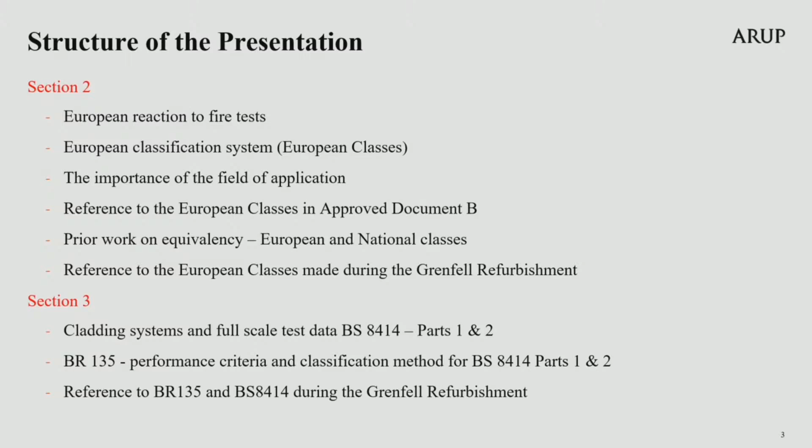In section 2, I will explain the 4 European reaction to fire tests, the European classification criteria, and the resulting European classes relied upon within approved document B. I will explain the importance placed on the relevant field of application for products tested using European reaction to fire tests, set out how European classes are referred to from approved document B, and then address some issues regarding equivalency when comparing the European classes with the national classes.

Finally, in section 3, I will provide a summary description of both the performance criteria given in the BRE report 135, which considers cladding systems, not individual products. I will also explain the full-scale tests and data produced from the fire tests called British Standard 8414, Parts 1 and 2. The data obtained from these tests is assessed using BR 135.

Then a classification report can be produced for the cladding system tested. I will explain earlier versions of these publications also and how they have been referenced from the statutory guidance documents over time.

The first thing I will present to you today relates to the basic science of fire in a compartment or room. A fire is characterised in a series of discrete stages for the purposes of scientific calculations and understanding. It is very useful to understand those stages and how they relate to the reaction to fire tests I'm setting out for you today.

I thought it was useful to explain in brief how fires behave in compartments or rooms because of what is stated in British Standard 476 Part 10. British Standard 476 contains a series of fire tests, 4 of which I'll be explaining in detail today. They are the 4 national reaction to fire tests.

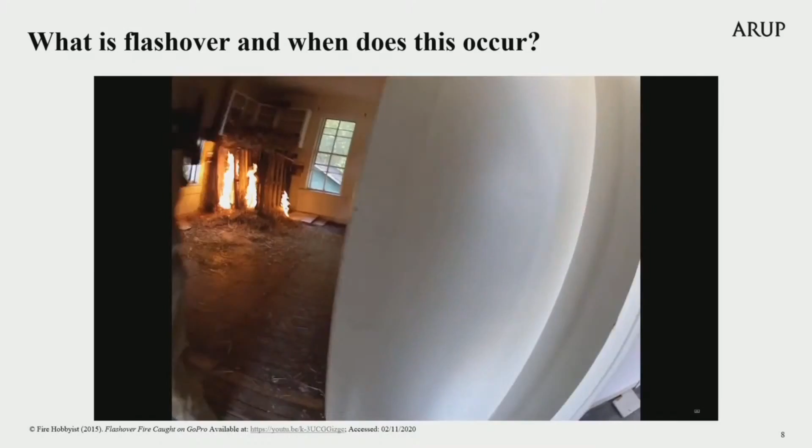It's from the helmet cam of a firefighter in a room as a fire grows rapidly. Watch how quickly the fire takes hold of the stacked timber in the corner and forms a smoke and flame layer at the ceiling within the room. The flame spreads across the ceiling, seeking out ventilation along the corridor. The smoke and flame layer builds down to floor level.

This room contains very little combustible material, and so a prolonged, fully developed fire cannot occur.

So back to BS 476 Part 10. It helpfully sets out what tests in the 476 series are relevant in the context of the classic room fire stages I have just summarised for you. It places the reaction to fire tests as relevant to the period of time before flashover. Flashover is marked with an X on this graph. The reaction to fire test references can be observed in the red marked area underneath flashover.

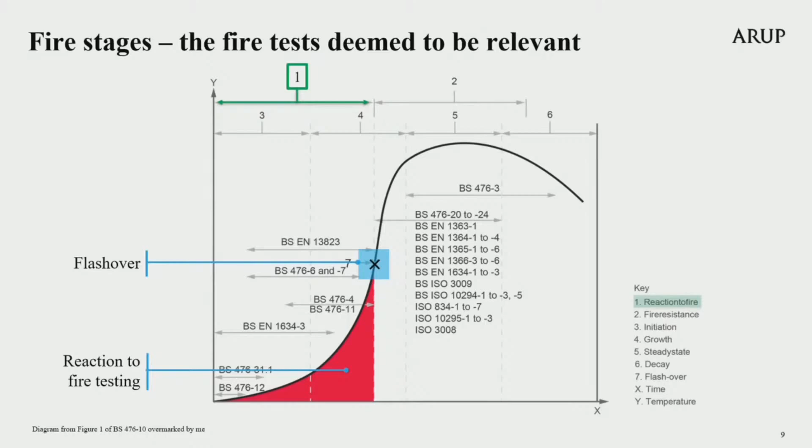The reaction to fire tests referred to for the external wall in the statutory guidance document are therefore associated with pre-flashover or early stage internal room fire growth. There are other tests referenced by the British Standard for the post-flashover condition, after the X marked on the graph. But what of reality, as we saw at Grenfell and have seen elsewhere?

We know there was a prolonged decay phase, in that it occurred at different times in all different parts of the tower. In this phase, the rate of burning is diminishing, the fuel is depleted of volatiles, the gas formed when something is heated in a fire. Flaming eventually ceases, and this stage leaves a mass of glowing embers. This state may remain for long periods, and there can even remain high localised temperatures.

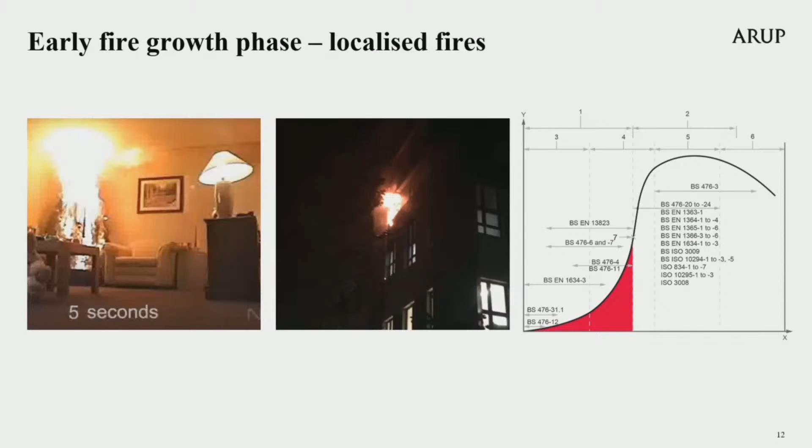And we know too that flashover did occur in many compartments, and so fully developed fires were observed throughout the night. The scale of these post-flashover fires, or fully developed fires, are much larger and their consequences more severe than the pre-flashover conditions. Flames may emerge from ventilation openings such as windows.

The threat to neighbouring compartments or adjacent buildings is then at its highest. The fire can spread through any internal openings, such as doors or unsealed openings in the compartment. So this is the stage of the fire when damage to structure becomes a concern. It is the time of highest life safety risk to firefighters, and it is too late for anyone who has not already left the compartment.

The panel can consider the following point: this external scenario, either when small or large, was separate to the internal room fire. This internal fire behaviour is characterised by the temperature-time graphs I've shown you today.

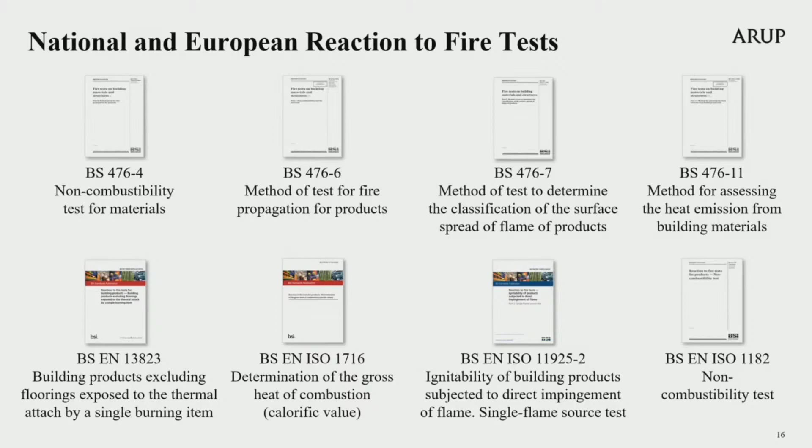I will now explain the setup for each one of these tests, how the test is then done, and how the results from each test is then used and relied upon to classify the performance of construction products and materials.

The 4 national reaction to fire tests are part of BS 476 series, as I said. Each part addresses a different element of contribution in a fire. Part 4 is a test of non-combustibility for materials. Part 6 is a test of fire propagation for products, meaning a comparative measure of the contribution to the growth of fire of a combustible material. Part 7 is a test to classify the surface spread of flame of a product. And Part 11 is a test to assess the heat emission from materials.

British standards are issued by the British Standards Institution. There are specific subcommittees made up of industry and governmental bodies that draft the standards. The second page of the standards typically lists the parties involved in drafting the standard. On screen now are examples taken from Part 4 and Part 6.

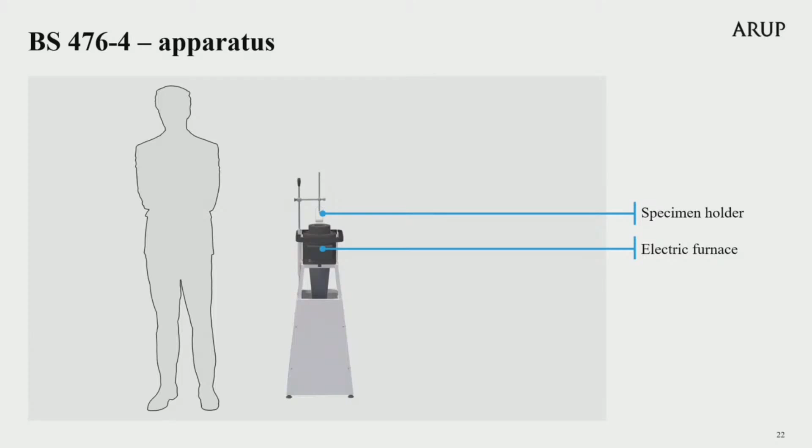A second thermocouple is placed in the centre of the specimen, inserted from the top. This shielded thermocouple shall maintain contact with the material at the bottom of the hole, drilled down halfway into the specimen.

The image on screen shows a cross-section through the furnace. The key thing to observe here is that the heat is provided by running electricity through wire coils wrapped around a central tube made of alumina refractory material. No direct flame impingement occurs in this test.

3 specimens are prepared, each side a length of 40 millimetres with a height of 50 millimetres. My colleague Tom is now holding up an exact replica of the size of the Part 4 specimen.

One complete test consists of testing 3 specimens, each specimen tested separately in the furnace. The specimen is placed in the specimen holder, which is shown in the image on the left. This holder is 100 millimetres high.

If the thickness of the material is less than the height required of 50 millimetres, each specimen must then be made of a sufficient number of layers to achieve this thickness. These layers should occupy a horizontal position in the specimen holder and held together firmly without compression of the specimen by steel wires to prevent air gaps.

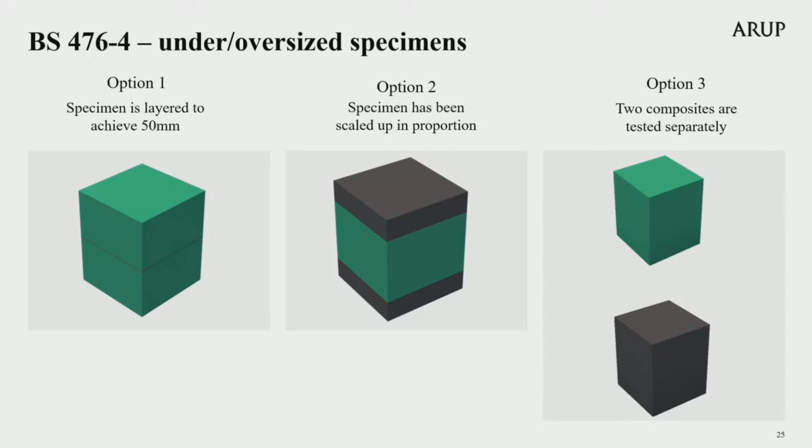I will now present a video of the test procedure.

For a tested material to be considered non-combustible by means of this test, none of the three specimens during the test must either cause the temperature reading from either of the two thermocouples to rise by 50 degrees Celsius or more above the initial furnace temperature, or be observed to flame continuously for 10 seconds or more inside the furnace. Otherwise, the material shall be deemed combustible.

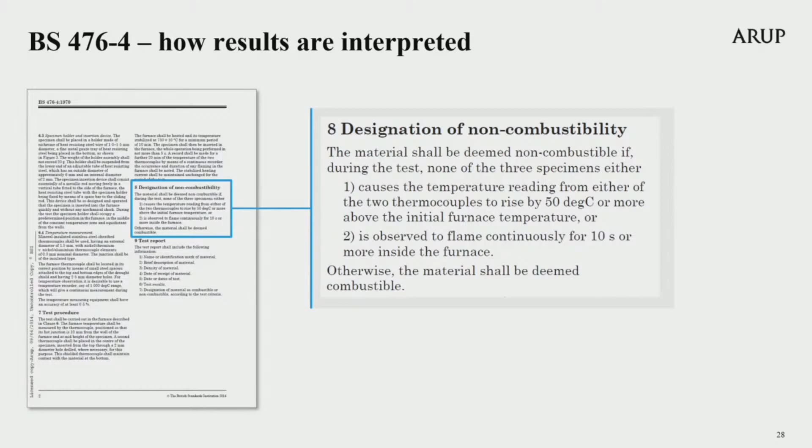The requirements of the test report are shown here, with a single designation to be provided. That concludes my description of the Part 4 non-combustibility test for materials.

This standard has had no amendments, and again, information was added to the foreword in 2014.

The Fire Vocabulary British Standard, BS 4422, defines fire as the process of combustion characterised by the emission of heat and effluent accompanied by smoke, flame, or glowing. So the purpose of this test is to assess the heat emission. It is done by measuring the temperature rise from the specimen as a result of being in a furnace, as well as the specimen mass loss and any observed flaming during the test.

The test apparatus in this heat emission test is similar to that used in the non-combustibility test, with a notable exception being the design of the specimen holder. Other amendments include a prescribed design for the electrical furnace windings. A mirror is proposed to allow the operator to observe flaming more easily. The apparatus also includes an additional support to the specimen insertion device.

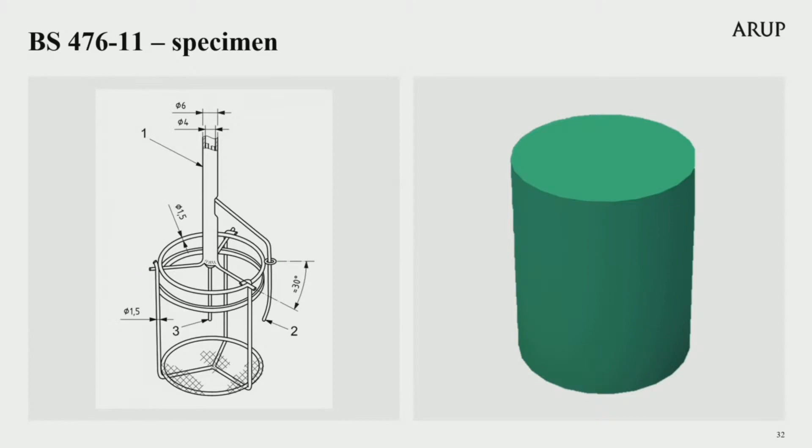The specimen is then put into the holder, as shown in the image on the left, and again a thermocouple is inserted through a 2 millimetre drilled hole at the top of the specimen. Again, specimens must meet the minimum height required for the test specimen of 50 millimetres.

For a material with a normal thickness greater than 50 mil, it should be reduced. If the thickness of the material is less than 50 mil, the right height should be made using a sufficient number of layers of the material or adjusting the material thickness.

The video on screen now shows this test procedure.

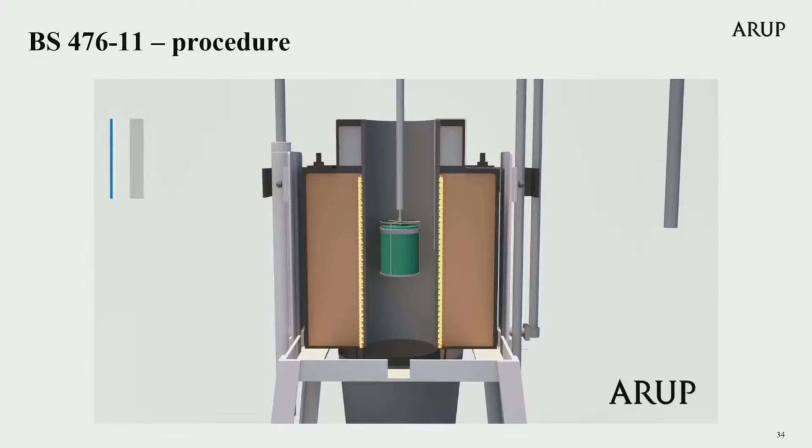Following the test, 2 results are calculated. First, the furnace temperature rise is calculated as the maximum furnace temperature minus the final furnace temperature. Secondly, the specimen temperature rise is calculated by taking the maximum specimen temperature minus the final specimen temperature.

This is calculated for each of the 5 specimens and an average value is obtained. The average duration of total sustained flaming is also calculated for the 5 samples and recorded in the report. The operator is also required to calculate and record the density, calculate the arithmetic mean of the density, calculate and record the mass loss of each individual specimen, and calculate the arithmetic mean of the mass loss of the specimens tested as a percentage. These 5 measurements must be recorded in the fire test report.

It is a requirement of the test report that the following text is stated: the results relate only to the behaviour of the specimens of the material under the particular conditions of the test. The results obtained on an individual material used in a combination should not be construed as reflecting the performance of the material combination as a whole, which may be influenced by the mechanism of combining the individual materials together, such as with adhesives. The results are not intended to be the sole criterion for assessing the potential fire hazard of the material in use. This is the important test for materials of limited combustibility, noting no evidence of such a test has been submitted to the inquiry at this time.

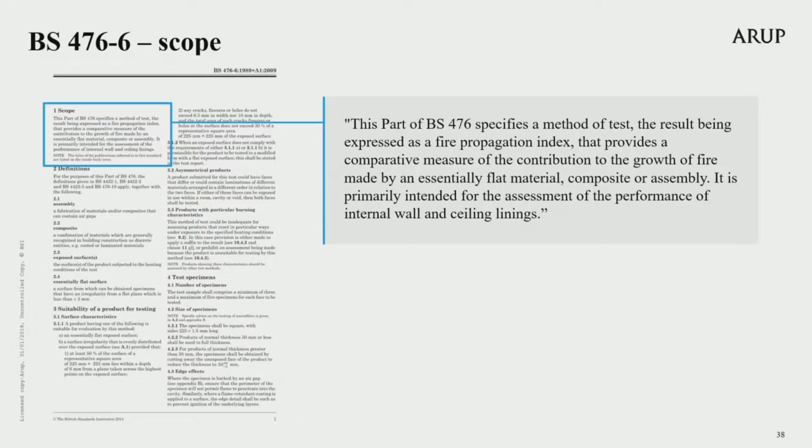The test apparatus comprises a combustion chamber with a specimen holder that is fixed onto the front face. The combustion chamber contains a horizontal gas burner tube and 2 electrical heating elements, and is surmounted by a removable steel chimney and cowl. The specimen holder is made from calcium silicate board, having the same dry density and properties as that of the walls of the combustion chamber.

The holder is recessed to take a specimen of area 225 millimetres by 225 millimetres, with a recessed depth of 12.5, 25, or 50 millimetres, depending on the specimen to be tested. A non-combustible compressible gasket 1 millimetre thick is provided for interposing between the specimen holder and the combustion chamber to assist in obtaining an adequate seal.

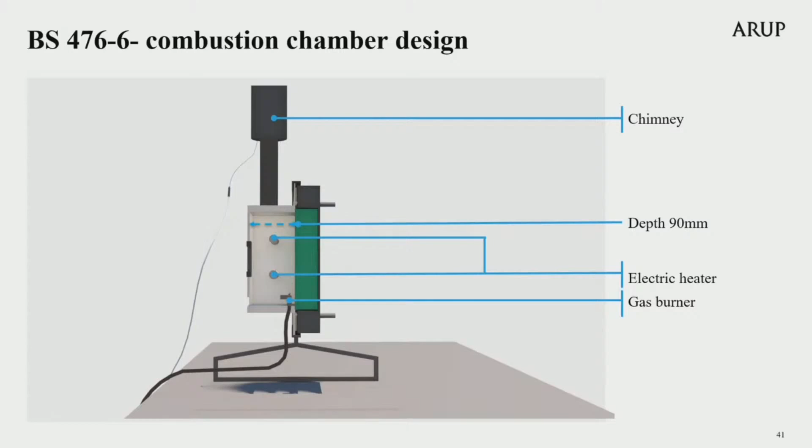The image on screen shows the specimen being held up in front of the opening to the combustion chamber. The opening to the combustion chamber recess is slightly smaller than the green specimen on the screen. Each specimen is square and measures 225 by 225, as I said. My colleague Tom is now holding up an example of the Part 6 specimen.

Whilst the sample is of dimension 225 millimetres, the opening in the combustion chamber is 190 by 190 millimetres. The result of this is that a boundary around the edge of the sample is not directly exposed to the heat from the electric heaters and gas burner.

Products with a normal thickness of 50 millimetres or less are tested at full thickness. For products of normal thickness greater than 50 millimetres, the specimen is obtained by cutting away the unexposed face of the product to reduce the thickness to the required 50 millimetres.

It is stated in the standard that where the product is normally used as a freestanding sheet, an airspace should be provided at the back of the product by testing over non-combustible perimeter battens. Where the specimen is backed by an air gap, ensure that the perimeter of the specimen will not permit flame to penetrate into the cavity. Similarly, where a flame retardant coating is applied to a surface, the edge detail shall be such as to prevent ignition of the underlying layers.

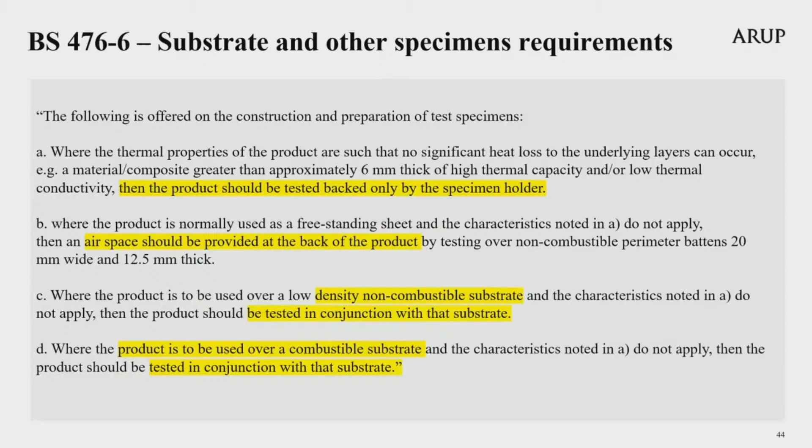These must include intumescence or deformation or spalling of the specimen that tends to block the burner ports so the required gas input cannot be maintained, or melting or slumping of the specimen that results in material escaping from the air inlet or being confined to the recess of the specimen holder where it is not exposed to the heating conditions.

Airflow through the apparatus being restricted owing to obstruction of the inlet port by fallen material or by soot accumulation in the chimney. Occurrence of any of the above phenomena shall deem the test on that specimen to be invalid.

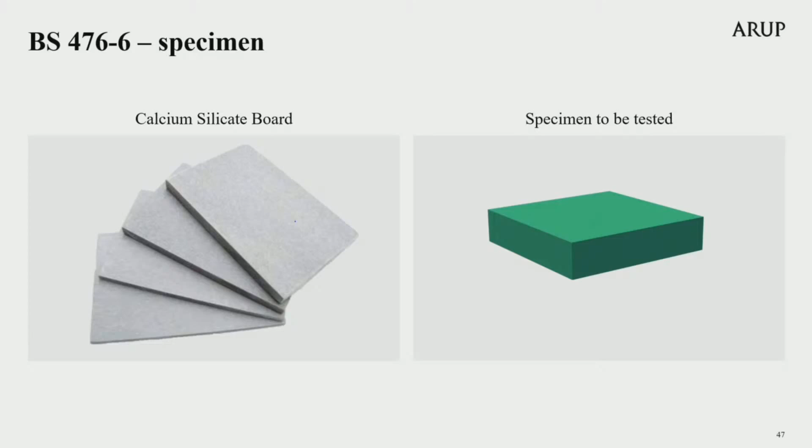I will now present a video of this test procedure.

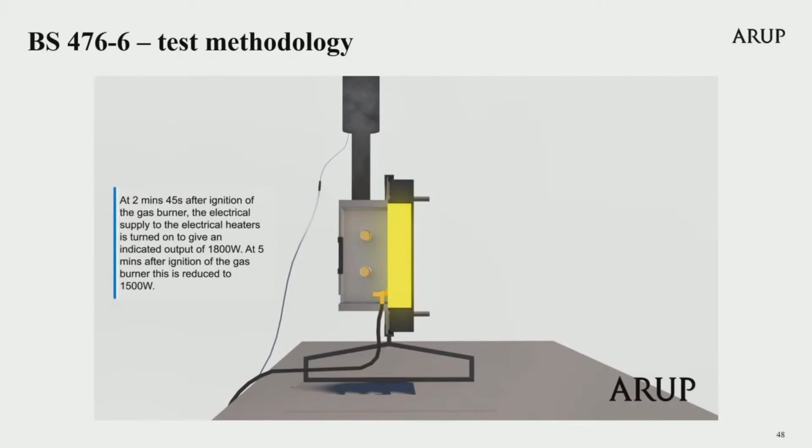The output from the 2 thermocouples located in the chimney is recorded at some specific intervals we need to discuss. At 0.5 minute intervals up to and including 3 minutes from the time at which the gas was ignited, and this is then converted to a parameter called S1.

At 1 minute intervals up to and including 10 minutes from the time at which the gas was ignited, this is then converted to a parameter called S2. At 2 minute intervals up to and including 20 minutes from the time at which the gas was ignited, which is then converted to a parameter called S3.

All the visual observations should be recorded during the test as observed through the window, as I have already explained.

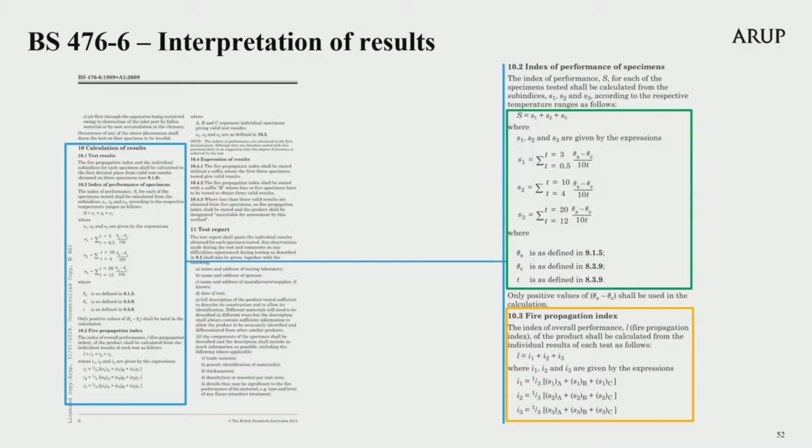The standard specifies the required contents of the test report. I particularly note the report must state details of the form in which the specimens were tested, material, composite or assembly, together with specimen thickness and, where appropriate, orientation, the backing material and the face or faces subjected to the test, and whether the material was tested in a modified form.

The statement that the suffix S to the fire propagation index indicates that the results should be treated with caution. And the test report must contain the statement that the test results relate only to the behaviour of the test specimens of the product under the particular conditions of test. They are not intended to be the sole criterion for assessing the potential fire hazard of the product in use.

The test setup is designed to prevent heating through the cut edges of the test specimen. For a composite material, therefore, such as ACM, it would mean the outer aluminium surface is heated first, and the products of combustion from any other material behind it, should they receive sufficient heat, together may cause a temperature rise in the chimney. This is why it is important to understand how much heat energy is applied to the sample in this standard test, which has a duration of 20 minutes.

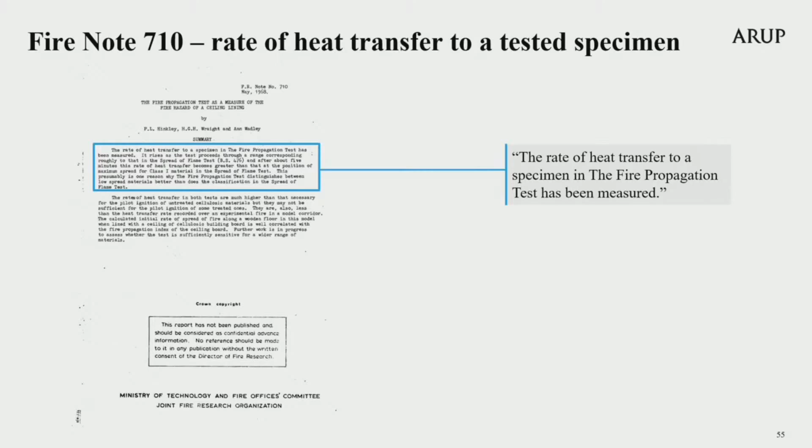I have found some historic work regarding this heating dose received on the surface of the specimen tested in Part 6. In 1968, the BRE issued Fire Note 710, titled The Fire Propagation Test as a Measure of the Fire Hazard of a Ceiling Lining. As stated in the note, part of the study involved measuring the rate of heat transfer to a specimen in the fire propagation test.

On screen now, I've shown some text explaining the heat exposure measurements produced in this paper. This is for background information only, because the key information I want to present is the graph referenced within this text.

So to understand if a similar heat received on a surface of a different type of specimen as a result of this scale of heating is then sufficient to ignite the specimen being tested, I present the following. I have compared the received heat measured in this paper on asbestos wood, shown by the dark blue line on the screen, with critical heat flux values associated with the materials used in the external wall of Grenfell Tower.

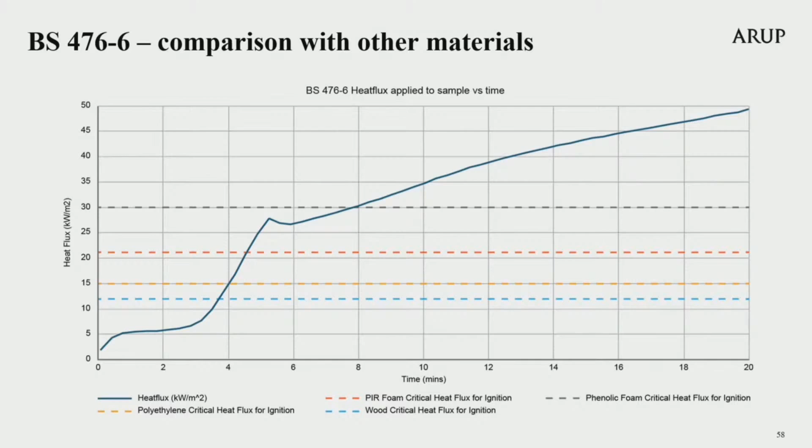To sum up, the Part 6 test is the fire propagation index test and is based on the temperatures measured in the chimney. The product tested is then assigned little s1, little s2 and little s3 sub-indices. These are averaged across 3 tests to obtain the sub-indices little i1, 2 and 3. The sub-index little i1 is therefore an average of measurements taken during the first few minutes of the test only, when the heating dose is relatively low.

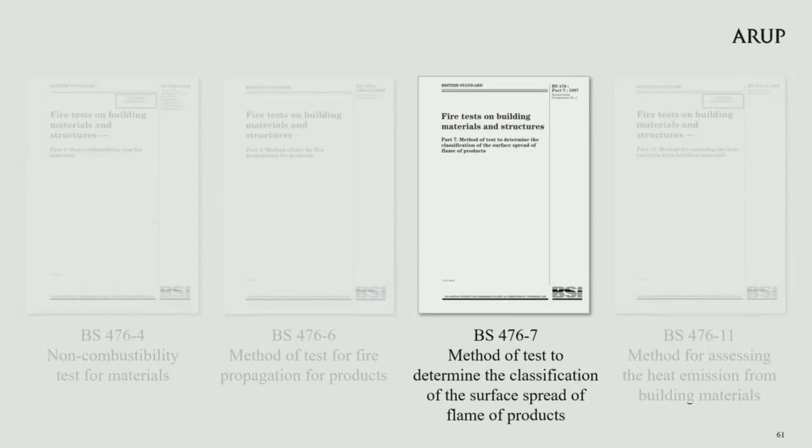The third national reaction to fire test is BS 476 Part 7, method of test to determine the classification of the surface spread of flame of products. This must be combined with Part 6, as I have just explained, when understanding the derivation of Class 0 as set out in the ADB.

I want to stress that Class 0 is not simply a surface spread of flame test, as so commonly stated. Only the Part 7 test on its own is, and there is no national class that relies solely on Part 7. Class 0 is defined on the basis of the two tests, and this is a critical distinction that must be incorporated in any evidence given to the inquiry regarding Class 0.

There have been 3 versions of Part 7 published, first in 1971, with 2 further revisions in 1987 and 1997, and a change to the foreword only in 2014.

The foreword section of Part 7 states the test takes account of the combined effects of factors such as ignition characteristics and the extent to which the flame spreads over the surface of the product under opposed flow conditions. The influence of any underlying materials on these factors in relation to their ability to influence the rate of fire growth is also taken into account.

The test result is a function of the distance and rate of the lateral spread of flame, and this is classified according to performance as classes 1 to 4.

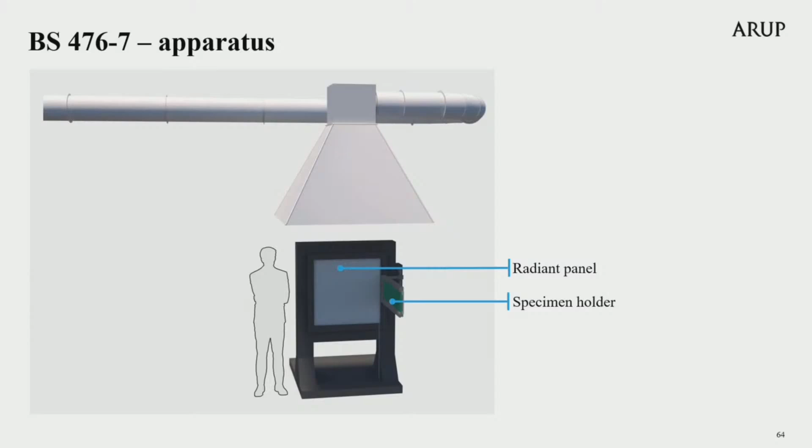This is the largest specimen required for a national reaction to fire test, and each specimen is a rectangle measuring 885 millimetres long and 270 millimetres in height. Tom is now holding up an exact replica of the Part 7 sample.

When the product is of insufficient size to allow the specimen size to be achieved in width or length, it is permissible for small pieces of the product to be placed adjacent to each other to obtain the required dimension, providing that an essentially flat surface can be achieved. It is considered in the test standard that such a procedure does not have any influence on the surface spread of flame, but the use of such specimens shall be reported.

The specimen holder comprises a water-cooled steel frame with water-cooled faceplates. The faceplates overlap the specimens by 20 millimetres on their top and bottom edges and over the vertical edge adjacent to the radiation panel. A spring-loaded clamp is positioned to clamp the specimen against the water-cooled faceplates.

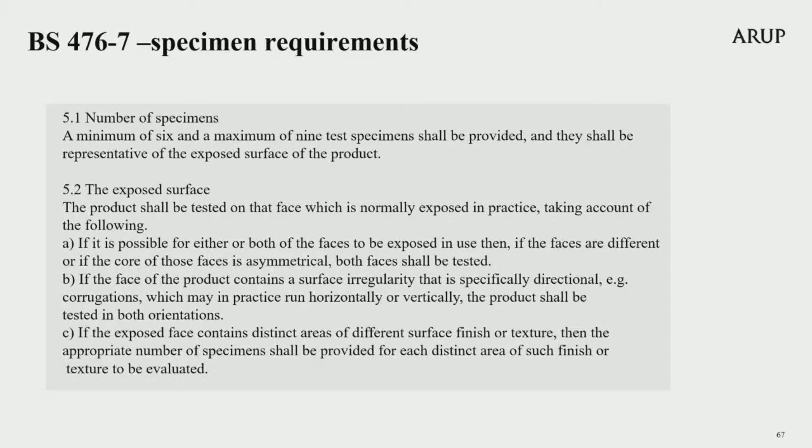The product shall be tested on that face which is normally exposed in practice, taking account of the following. If it is possible for either or both of the faces to be exposed in use, then if the faces are different, or if the core of those faces is asymmetrical, both faces shall be tested. If the face of the product contains a surface irregularity that is specifically directional, for example corrugations, the product shall be tested in both orientations. If the exposed face contains distinct areas of different surface finish or texture, then the appropriate number of specimens shall be provided for each distinct area of such finish or texture.

All specimens shall be tested at full thickness or cut away, as I explained earlier. When the product is a thin film, it shall be applied to an appropriate substrate using a method and application rate recommended by the manufacturer. The lab shall determine whether a product incorporates a thin film on its surface and shall note if this is the case. When the product is a material or composite which would normally be attached to a substrate, it shall be tested in conjunction with the appropriate substrate, also using the fixing technique recommended by the manufacturer. Please note the significance that this standard makes to the effect of the underlying substrate, and the reader is referred to Appendix B of Part 7 for more information.

Part 7 also provides a clear explanation regarding the impact of any underlying construction on the ignition performance of the surface. This test standard again provides rules on how the sample should be tested as a result.

I will now explain the heating apparatus. It essentially consists of a radiation panel mounted vertically in a surround and supported on a framework so that the centre of the panel is 1.25 metres above floor level. The radiation panel shall be supplied with a gas-air mixture. The radiation panel is 900mm by 900mm square, designed to give efficient combustion of the gas-air mixture with no flaming occurring on the face of the panel under operational conditions.

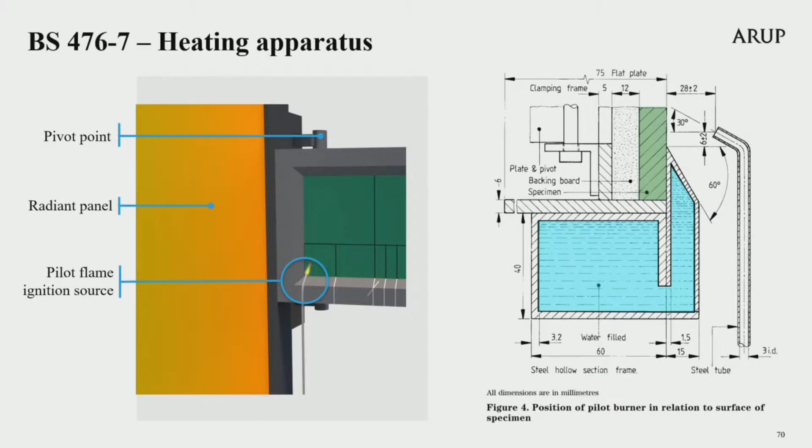The video on screen now shows this test procedure.

So do you mind if I just try and get the video to work? Yeah. Oh yeah, thank you. Apologies.

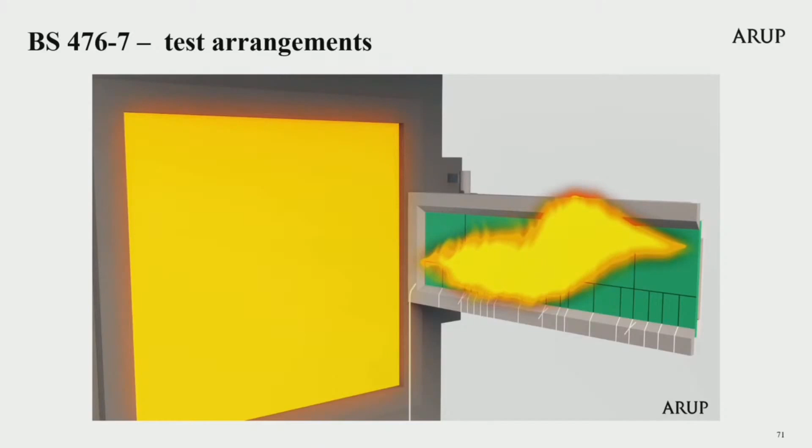Throughout the test, it is required to carefully observe the behaviour of the product and make a note of the following phenomena: flaming, transitory flaming. Observe and note other phenomena such as debris falling away from the specimen and whether it is flaming or not, and any intumescence or deformation of the specimen. These additional observations do not influence the classification of surface spread of flame.

The inquiry panel should consider that only one of these four tests actually measures the rate of flame spread across a specimen, and the purpose of that test was to measure horizontal spread along walls and ceilings.

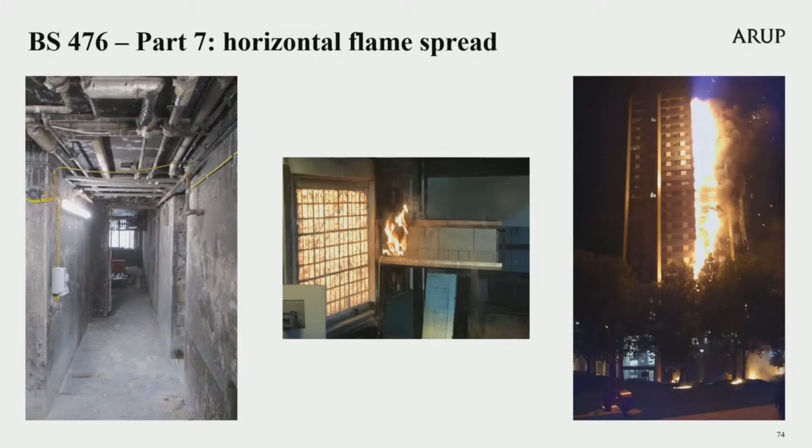I'm just going to do about two more slides.

Finally, I want to explain what extending the field of application means - a phrase that will be used over the coming months when referencing test reports and test standards. As I've shown, each test report for the national reaction to fire tests must contain specific information, including the limits of what was physically tested.

Part 10, the Guide to the Principles of Fire Testing and Their Outputs, states at paragraph 5.3: within the field of reaction to fire, direct field of application is the application of the test results for a material or product in accordance with the details of how they are tested. Specifically, this means that the mounting and fixing arrangement used in the test method is applied directly to the use of material or product in real end-use conditions.

Any variation in the physical properties or thickness of material or product in the end-use application, or variations in the mounting and fixing arrangements, should be either quantitatively determined through a carefully designed test programme, or in some cases be the subject of an assessment or expert judgment by an expert.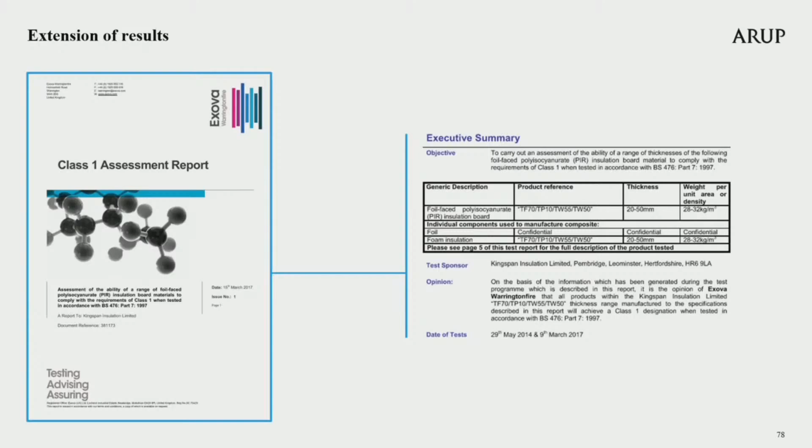No such field of application extensions have been submitted to the inquiry for cladding panels at this time. I've provided my opinion on how the BBA relied on a limited number of tests to issue a BBA certificate for cladding panels at length in my Phase 1 report.

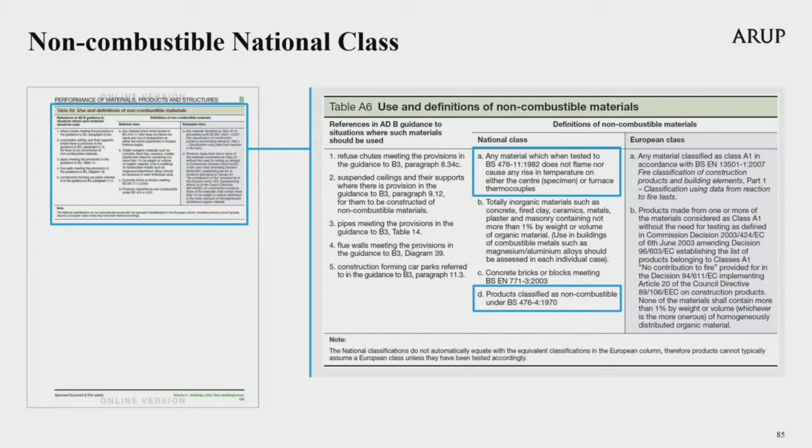The table on screen compares the 2 limits set for the national class non-combustible using Table A6 of Approved Document 2013. So one can either do a Part 4 test or a Part 11 test. All results must have been recorded as 0 if one relies on Part 11.

The second fire definition provided in Approved Document B is in Table A7, use and definitions of materials of limited combustibility. This is a key definition regarding the products used on Grenfell, as the insulation material in the external wall should have been a material of limited combustibility. You can see in paragraph A that any material defined as non-combustible will also satisfy the national class for limited combustibility too.

The primary test that can be done to demonstrate limited combustibility using national test standards is Part 11. Density limits are set, as well as flame and temperature rise limits. I have drawn out the text on the right-hand side of the screen. The column on the left-hand side provides references to specific sections of Approved Document B where limited combustibility is referenced with respect to the situations where such materials should be used. The references as shown in row 8 of the table apply only to insulation used as part of an external wall. It is critical to understand the explicit reference to insulation in the external wall made in this Table A7.

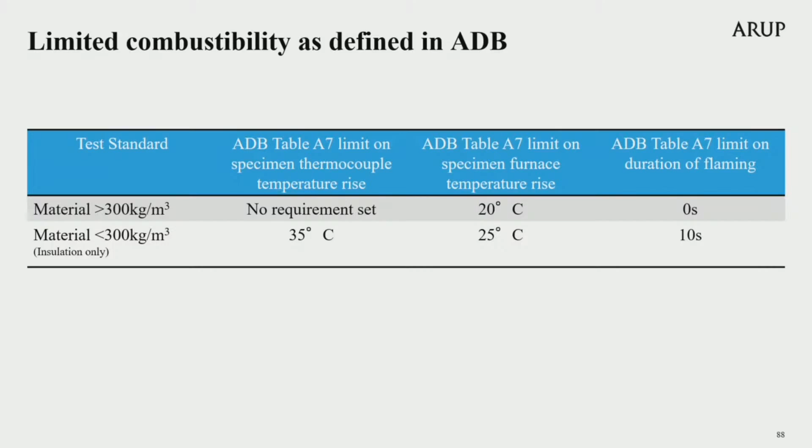The definition of a material of limited combustibility sets out not just temperature and flaming limits, but also makes a distinction regarding the density of the insulation material. If the material density is more than 300 kilograms per meters cubed, the limit on specimen furnace temperature rise is 20 degrees C, with 0 seconds of flaming to have been observed in the Part 11 test. If the material is of density less than 300 kilograms per meters cubed, the limits for observed flaming increase to a total of 10 seconds over the course of the whole test. The limit on specimen furnace temperature rise is slightly higher at 25 degrees Celsius, with an additional limit set on specimen thermocouple temperature rise of 35 degrees C.

The requirement for materials less than 300 kilograms per meters cubed density is therefore less onerous when relying on Part 11 test. It's worth noting that insulation materials are often foam-based and may well have a density less than 300 kilograms per meters cubed. For example, the density of phenolic foam and PIR, the insulation used on Grenfell, may have a density of around 35 kilograms per meters cubed.

However, a material of limited combustibility is also referenced for another component of the external wall, and this is a complex matter which I will try to explain carefully. In Table A7, up at row 6, marked in blue here on the left, there is a general row which

states Class 0 materials meeting the provisions in Appendix A, paragraph 13A. There, at Appendix A, paragraph 13A, it defines Class 0 as the highest national product performance classification for lining materials. This is achieved if a material or the surface of a composite product is one of two performances set.

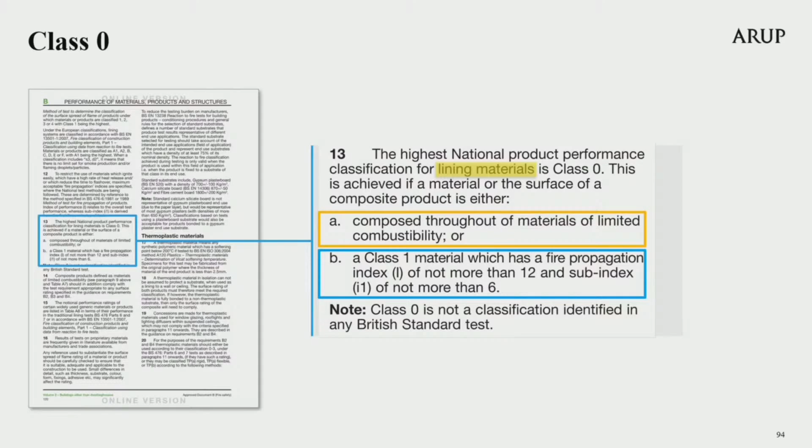These values are then used in the formulae shown on the screen now to obtain S1, S2 and S3. The calculated S1, S2 and S3 values are then averaged to obtain little I1, 2 and 3, where I is then the sum of these sub-indices.

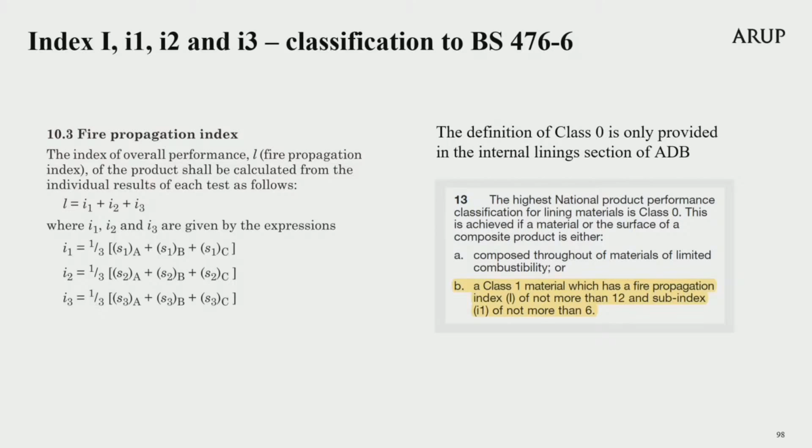Please now look again at the definition of class 0 on the screen marked in yellow. There it states for class 0, the fire propagation index must be not more than 12, and sub-index little I1 must be not more than 6. And so the test results from Part 6 on a material or composite product must fall within these limits.

Additionally, the class value of 1 must be achieved when the same product is tested to Part 7. Class 1 means the flame must not spread more than 165 millimetres from the heated end after 1.5 minutes into the test. But in Class 1, it must not also exceed this limit for the entire duration of the test for up to 10 minutes.

Because the fact that 2 test result types form the definition of Class 0 is so regularly ignored, with the surface spread of flame test mostly only referred to when discussing Class 0, I think it's important I repeat this point again, that the Class 0 material must be tested to achieve Class 1 and tested again to determine its fire propagation index and to fall under the limits set in approved document B.

Crucially, regarding the external wall at Grenfell Tower, Class 0 is also referred to within diagram 40, which presents the provisions for external surfaces or walls. Taking Grenfell Tower as the building example, the external surface classification was Class 0 for the building because it had a dimension over 18 metres and it was 1,000 millimetres or more from the relevant boundary to adjacent buildings, and this applied to the part of the building over 18 metres. See the dark grey shading on the right-hand side highlighted in yellow.

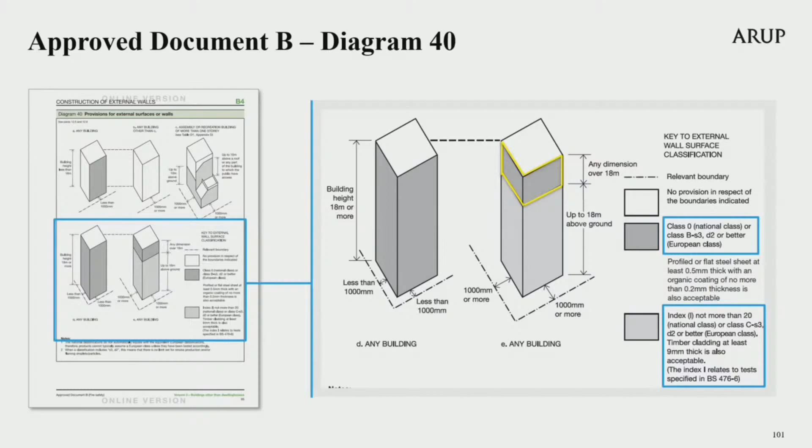Some final points about Class 0 due to its significance to the work of this inquiry. So I now want to set out how long Class 0 and the two tests upon which it relies, Part 6 and Part 7, have been referred to as the fire safety performance class for external walls in England and Wales.

The first national building regulations in England were the Building Regulations 1965. Prior to this, individual local authorities set their own performance requirements through local bylaws. London retained their own bylaws until 1985. In 1965, the external wall construction was not to include any combustible material except specific internal linings or specific external cladding.

The cladding is explained later on in Regulation E7 at Part 3B, shown on screen now. It required cladding on any external wall more than 3 feet from the boundary in a building greater than 50 feet in height to have a surface complying with the requirements for Class 0. Class 0 at that time was defined by prescribed construction typologies and with the only test referenced, the surface spread of flame test as existed in 1953.

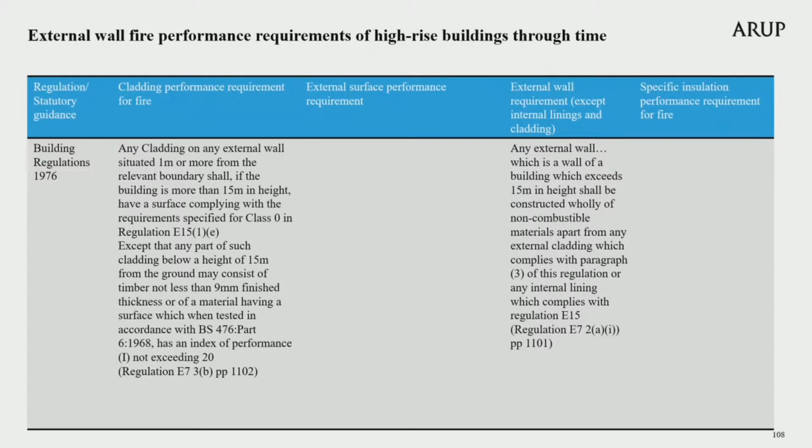In 1976, external cladding above 15 metres was still required to achieve Class 0. However, the definition of Class 0 was changed again this year to refer to both Part 6 and Part 7 tests. In 1985, the fire performance for the external wall performance was dropped down from non-combustible to constructed of materials of limited combustibility, and the Part 11 test standard was introduced. There were some changes too to Class 0, and I will explain these later.

In 1992, for the first time, a separate external wall surface. The insulation performance standard was a material of limited combustibility. The definition of high-rise increased from 15 to 20 metres. In 2000, an alternative for the external surface only was introduced by means of a BRE Fire Note number 9, with the insulation performance limits now set only for a ventilated cavity. The definition of high-rise was also lowered to 18 metres.

In 2002, the European classification system was introduced as an alternative to the national classes. In 2006, an alternative approach for the whole performance of the external wall was introduced by means of BR 135, and the insulation definition changed again, as shown on the slide. This has remained the case until 2013.

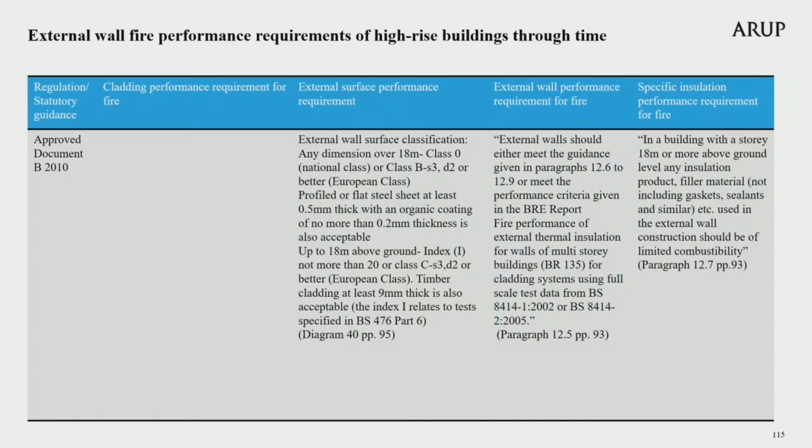I have shown how Class 0 has been referred to in the building regulations and statutory design guidance for that time period. It's important for the panel to understand the primary changes to the definition of Class 0 in that time period also.

Class 0 was originally based on a surface spread of flame test only, from the 1953 test standard, but was defined in 3 different ways: non-combustible throughout, or a material with a non-combustible background and specific tested fire performance of the surface, or a material with a combustible background but non-combustible face. Note the careful distinction between substrate and surface.

There were a few changes in the 1972 building regulations. Part 6, the fire propagation test, had been created by the BRE in 1968 after they identified that the highest classification, Class 1, from the surface spread of flame test could not differentiate between different combustible linings. The definition of Class 0 was therefore changed to refer to Part 6 only. The combustible substrate with non-combustible surface definition was dropped, leaving 2 options instead of 3: non-combustible throughout was retained, and the second option relied on the Part 6 test.

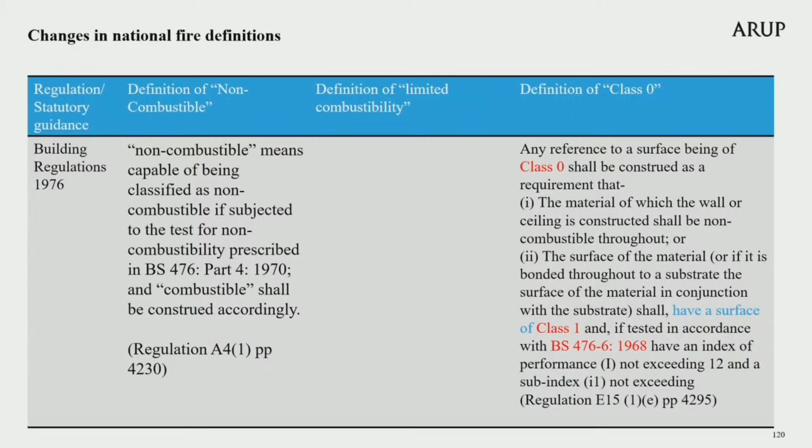This changed again in 1976, when the definition of Class 0 became based on both Part 6 and Part 7, and this combination of tests has been relied on ever since. The 2 distinct definitions for Class 0 remained: either constructed throughout with non-combustible materials, or a surface tested with a substrate, as shown on the slide.

However, in 1985, the definition of Class 0 was significantly changed. First, it stopped relying on non-combustible materials, and instead a Class 0 material or surface of a composite product could be composed throughout of materials of limited combustibility, a lower standard. Secondly, the requirement to consider the substrate with the surface was removed from the text in the statutory guidance document. This remained the definition up to the time of the Grenfell fire.

During the primary refurbishment works, the national class standards were relevant. These first referred to Section 12 of Approved Document B, in accordance with external surfaces at Section 12.6. The external surfaces of walls should meet the provisions in Diagram 40, where the national class note is cited as I have explained. And for insulation materials and products at Section 12.7, in a building with a storey 18 metres or more above ground level, any insulation product, filler material, not including gaskets, sealants and similar, used in the external wall construction should be of limited combustibility.

The Celotex FR5000, RS5000 and the Kingspan K15 insulation were presented as achieving national class naught. They were not presented as the required material of limited combustibility. ADB in Table A7 for materials of limited combustibility, at row 8 for insulation, makes no reference to class naught.

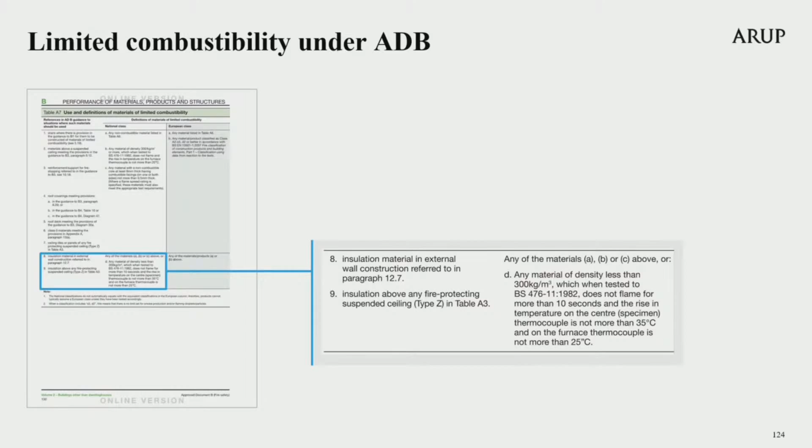The Arconic Reynobond panels were also presented as achieving a national class on their BBA agrément certificate, which stated behaviour in relation to fire. In relation to the building regulations for reaction to fire, the panels may be regarded as having a class naught surface.

This certificate then goes on to state at 6.2 that a fire retardant sample of the product with a metallic grey PVDF finish, when tested in accordance with Part 6, achieved a fire propagation index I of 0, and when tested in accordance with Part 7, achieved a Class 1 surface spread of flame. It goes on to state at 6.3, as a consequence of Section 6.1, which I will explain later, and Section 6.2, that the products may be regarded as having a Class 0 surface in relation to Approved Document B of the Building Regulations 2000.

I wanted to show you the test results from the test report upon which the BBA relied. There you can see the fire propagation index is recorded as 1, and the sub-index little I1 as 0.

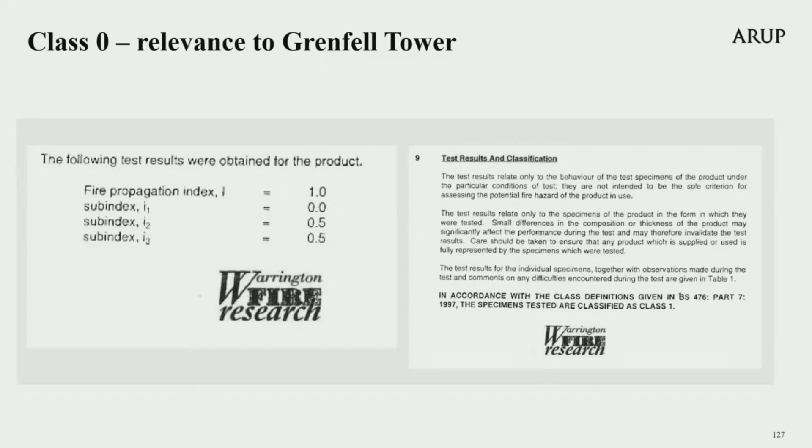And that concludes my section of the presentation on the national classes and classifications. Thank you. Just going to do a short pause.

Okay, I will now explain the European reaction to fire tests. It is useful to note that some of the test methods are similar to those relied upon in the national class system, and others are very different. Also, there's a dedicated classification process presented in a bespoke classification standard. Therefore, the European system does not rely on definitions within the statutory guidance document as occurs for the national classes.

I'm going to explain 4 European test standards. Unlike the British tests, which all sit within the 476 series, the European reaction to fire tests each have their own unique numbering, as does the associated classification standard, called BSEN 13501 Part 1. First, I will explain each of the 4 tests, and then I will explain the classification standard.

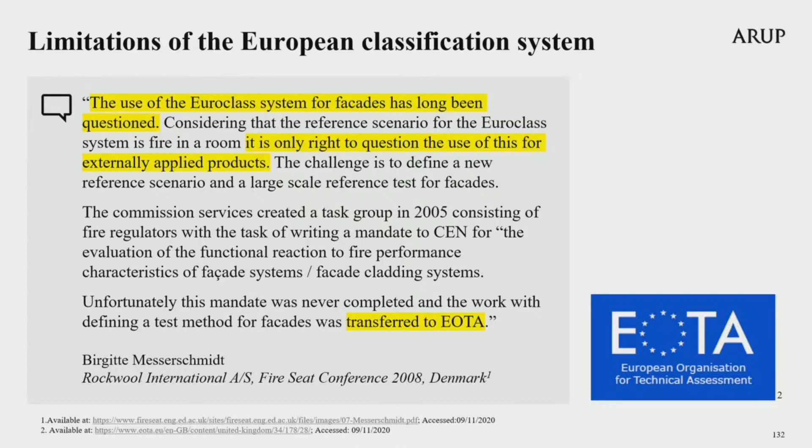There are 4 European reaction to fire tests referenced by the classification standard for construction products. Each part addresses a different element of contribution in a fire. BSEN ISO 1182 is a test of non-combustibility for materials. BSEN ISO 1716 is a test to determine the gross heat of combustion in a bomb calorimeter. BSEN 13823 tests how a specimen reacts when exposed to thermal attack by a single burning item in the corner of a room. And finally, BSEN ISO 11925-2 measures the extent of vertical fire spread and production of flaming droplets and particles when a specimen is exposed to a single flame source for a defined period of time only.

The first European reaction to fire test I will describe is the non-combustibility test. The 2010 version was relevant during the Grenfell Tower refurbishment. It is cited as the fifth edition of the standard, cancelling and replacing the 4th edition before it.

This test is used for determining the non-combustibility performance under specified conditions of homogeneous products and substantial components of non-homogeneous products. The test apparatus is very similar to that used in BS 476 Part 11, as it comprises an electric furnace capable of maintaining a steady temperature of 750 degrees C. In the European test, thermocouples are used to measure the temperature within the furnace. A specimen thermocouple can be added optionally, and it is not subsequently used in the classification.

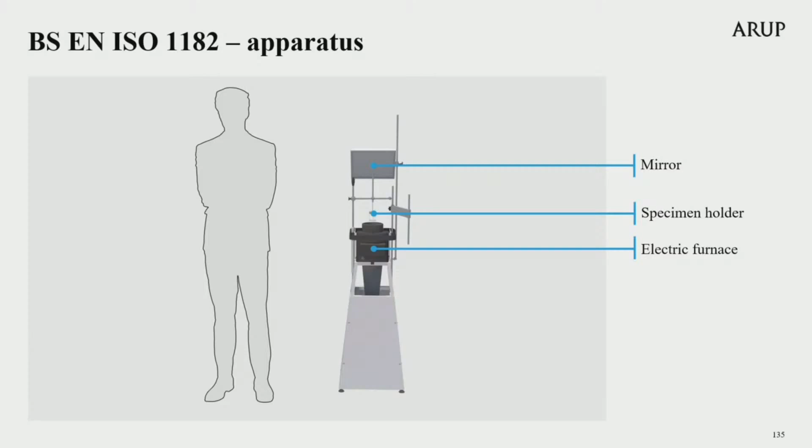5 cylindrical specimens are prepared, each with a diameter of 45 millimetres and a height of 50 millimetres. They are tested individually, but data is required from all 5 specimens to determine the final test result. If the thickness of the material is different to 50 mil, specimens may be layered and then secured with steel wires, or the material thickness may be adjusted.

Tom is now holding up examples of these specimens for the European test.

Prior to the test, specimens are conditioned and each specimen is weighed and its mass recorded. I'm showing a video of this test now.

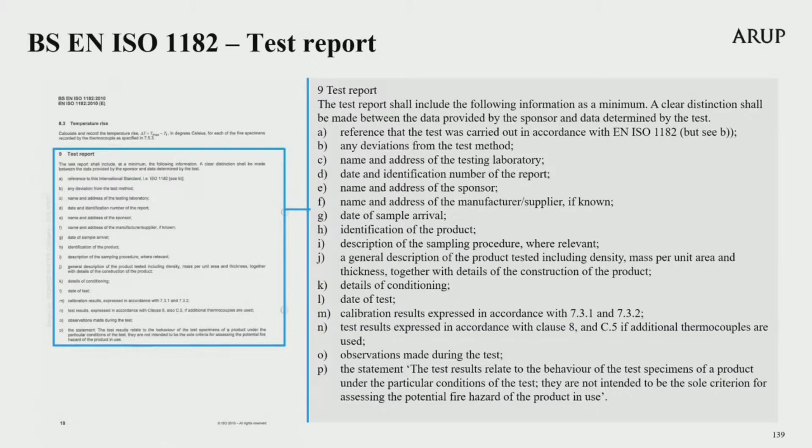The test report has to include a general description of the product tested, including the density, mass per unit area, and thickness, together with the form of construction of the test specimen, and the statement that the test results relate to the behaviour of the test specimens of a product under the particular conditions of the test. They are not intended to be the sole criterion for assessing the potential fire hazard of the product in use. So the same statement again.

The second European reaction to fire test I will describe is BSEN ISO 1716, determination of the gross heat of combustion. Heat of combustion is defined as the thermal energy produced by combustion of a unit mass of a given substance. Gross heat of combustion is the heat of combustion when the combustion is complete and any produced water is entirely condensed under specified conditions.

The bomb is a watertight vessel containing pure oxygen, contained within a larger enclosure filled with water. When the specimen is burnt in the inner watertight vessel, it releases heat which is transferred through the walls into the surrounding water, heating it up. The increase in water temperature is measured using a thermometer, and a stirrer driven by a constant speed motor is placed in the calorimeter.

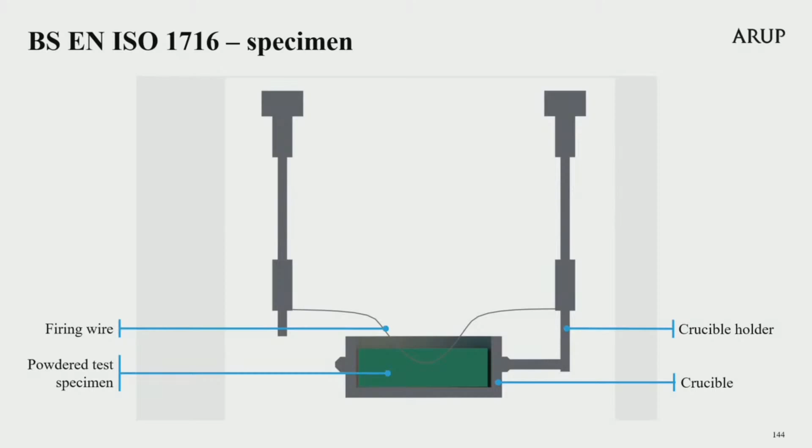0.5 grams of the specimen is placed in a crucible along with 0.5 grams of benzoic acid, to assist the sample to combust. This crucible is just a non-combustible holder used to store the material within the bomb. The specimen is not directly exposed to flame, but a firing wire is inserted into the crucible holder. When an electrical current is passed through this wire, the material is ignited and the temperatures begin to rise.

It's important to note that metal powders are not suitable for use in the bomb calorimeter, as they represent an explosion hazard due to overpressures created within the test vessel. Therefore, where metallic components are present within a composite material, their gross heat of combustion is deemed to be 0 and no test is required.

I will show you a video of this test now.

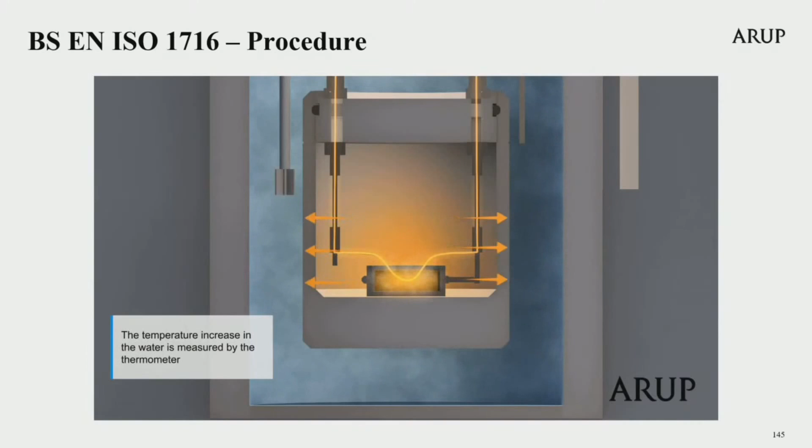Again, very detailed activities are required as defined in the test standard. 3 0.5 gram specimens are tested, and the gross heat of combustion for each is then calculated based on the increase in temperature of the water.

This can be done as it is a scientific constant that it takes 4,184 joules of heat energy to heat 1 kilogram of water by 1 degree. As the quantity of water in the calorimeter is a known value, the amount of energy it took to heat up can be back calculated.

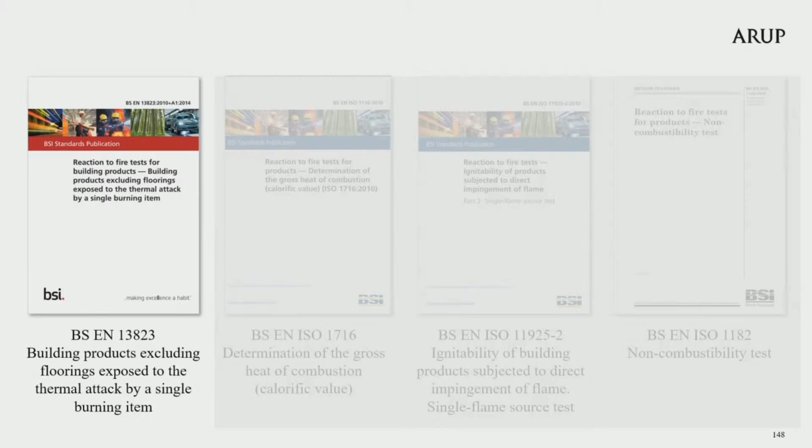The third European reaction to fire test I will now describe is known as the single burning item test. This British standard is the UK implementation of a European norm, and the 2014 version was relevant to the Grenfell Tower refurbishment. It superseded a 2010 version, which was withdrawn.

In the single burning item test, a specimen forming a corner is tested. Tom is now standing next to an exact to-scale replica of the BSEN 13823 single burning item test specimen.

The specimen holder is a metal frame with a calcium silicate board facing called the backing board. The specimen to be tested is fixed onto the backing board according to the fixing conditions in the end-use application required. The specimen holder comprises 2 wings, designated a short and a long wing. It is the largest specimen used in any of the reaction to fire tests in either Europe or nationally.

The long wing has a length of 1 metre and a height of 1.5 metres. The short wing has a height of 1.5 metres but a shorter length of 495 millimetres. The maximum depth or thickness of the total specimen tested in the single burning item test is 200 millimetres.

Specimens with a normal thickness greater than 200 millimetres are cut away from the unexposed side so they fit into the test rig. Materials with a thickness less than 200 millimetres are tested at their normal thickness with no requirement for scaling up. A total of 3 specimens are tested, and both long and short wings must be replaced after each test run.

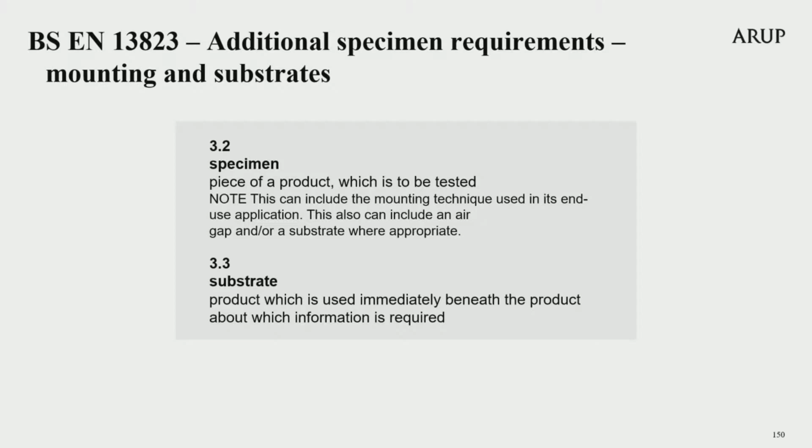The single burning item test also refers to further information about how the specimen is mounted in its end-use application, including the presence of substrates. These are products used immediately beneath the product about which information is required. The single burning item test standard sets out clear guidance regarding the issue of mounting and substrates. This is the test upon which Arconic relied regarding Reynobond products.

When products are tested and mounted as in their end-use applications, the test results are then valid only for that application. When products are tested using a standard mounting, additional guidance is provided. For example, boards in the end-use application of a ventilated cavity behind it shall be tested with a cavity of at least 40 millimetres. Boards to be mechanically fixed to a substrate in their end use should be test fixed to a substrate using appropriate fixings. And products that in their end use application are glued to a substrate shall be tested glued to a substrate.

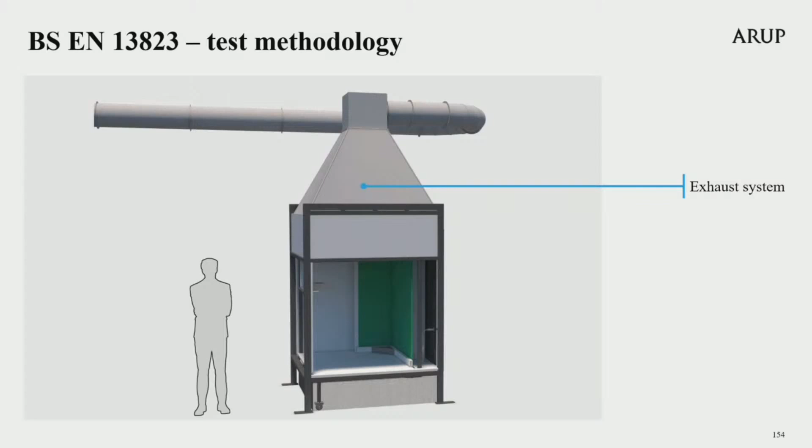The video on screen now shows the test procedure for the single burning item test.

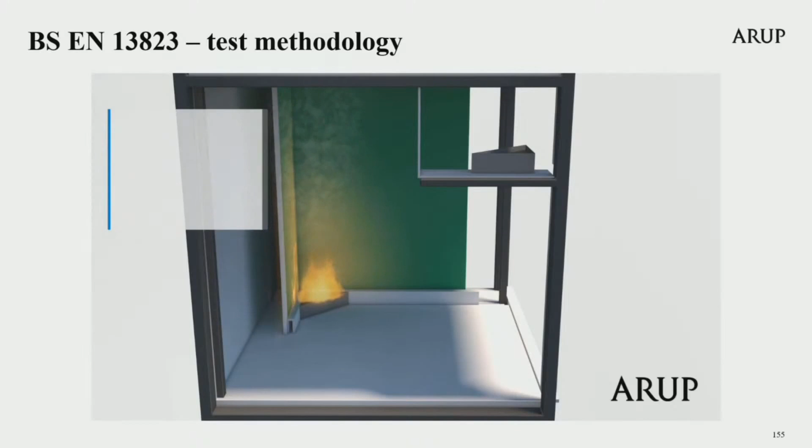So again, there are very detailed sets of requirements for the data to be produced, or measured, in this test. The horizontal flame spread is recorded as the occurrence of sustained flames reaching the far edge of the long wing specimen. The fall of flaming droplets or particles shall be recorded only within the first 600 seconds of the exposure period, and only when the droplets or particles reach the floor level of the trolley outside the burner zone.

After 26 minutes, the gas supply is terminated and the automatic recording is also stopped. And I've explained all the sensors in the exhaust duct - these quantities are recorded automatically and used to calculate the volume flow, the heat release rate, and the smoke production rate from the specimen during the test.

Section 9 of the standard sets out how the results of this test must be expressed. There is a lot of data and analysis required, and it is essential to read the BS EN in full to understand this - these are key to the European classes. In short, the burning behaviour is represented by a series of graphs showing the average heat release rate, the total heat release rate, and the fire growth rate indices versus time. The smoke production behaviour is given as a further series of graphs of the average smoke production, the total smoke production, and the smoke growth rate index.

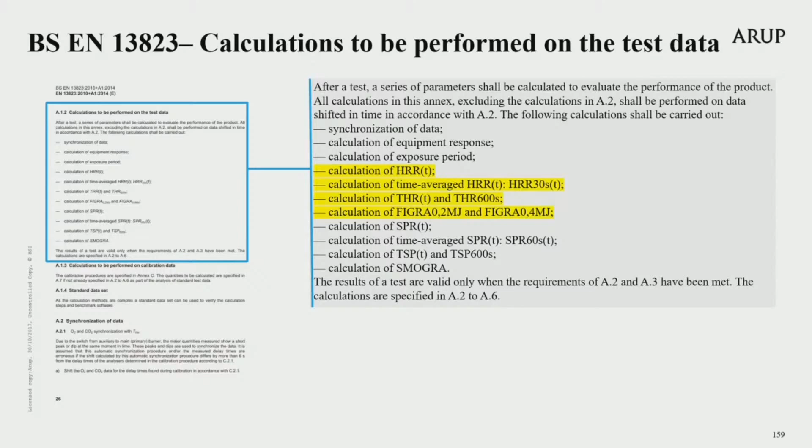Annex A of this standard goes on to set out in detail the series of parameters that must be calculated to evaluate the performance of the product. I've marked only some of them in yellow here. These include the total heat release rate, noted as THR on the screen, and the fire growth rate indices, noted as FIGRA values. But all of the calculations listed here must be carried out using the test data.

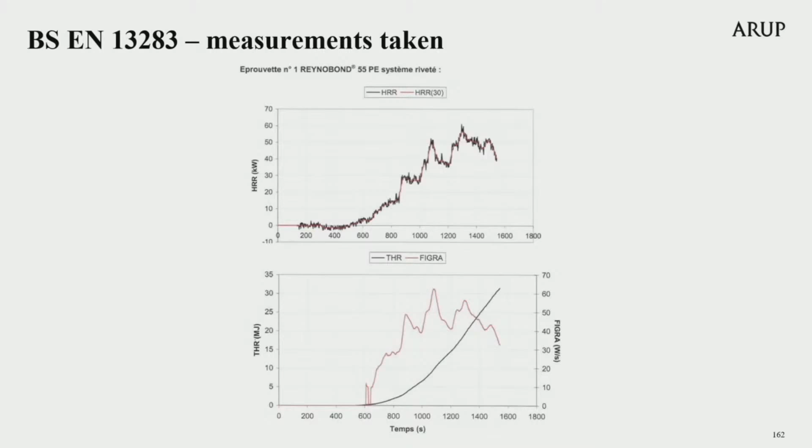It is a little easier to understand the data analysis by observing how the results are then presented in a test report. On screen now are the heat release rate versus time, THR, and FIGRA graphs for the Arconic Reynobond 55PE riveted panel.

Finally, the fourth European reaction to fire test is BS EN ISO 11925 Part 2, the ignitability of building products subjected to direct impingement of flame. This is referred to as the European Single Flame Source Test. It is designed to simulate a small flame being directly applied to the surface or to the edge of a material. The standard is dated 2010, the version relevant to the Grenfell Tower refurbishment. It superseded a version dated 2002, which was withdrawn.

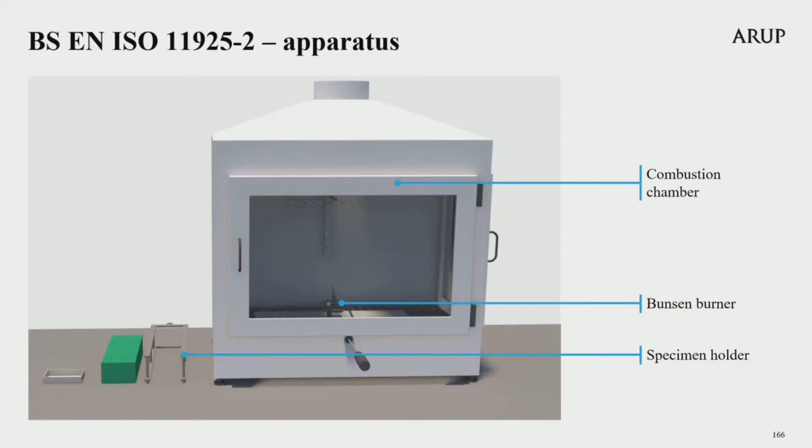The sample is suspended from the back wall of the outer housing, and the Bunsen burner is mounted onto a horizontal plate so that it moves smoothly forwards and backwards in a horizontal plane along the centre line of the combustion chamber. An aluminium tray containing sheets of paper is placed below the sample so that any flaming droplets will land on the paper and potentially ignite it.

A test specimen 250 millimetres long by 90 millimetres wide is prepared. The maximum permitted thickness of the specimen is 60 millimetres. A material that is normally less than 60 millimetres can therefore be tested to its full thickness, and a material that is greater than 60 millimetres should be cut down from the unexposed side to fit into the test rig. Tom is now holding up a to-scale replica of the test specimen.

As stated on the screen, a total of 6 representative specimens are required in one test. Another key point: if a product is installed with covered edges but can also be used with unprotected edges, tests shall be performed on both covered and uncovered specimens. This is different to Part 6 and Part 7 discussed earlier, where the tests are designed to prevent edge exposure. Again, the issue of incorporating the influence of the substrate on the specimen behaviour is addressed clearly in the standard.

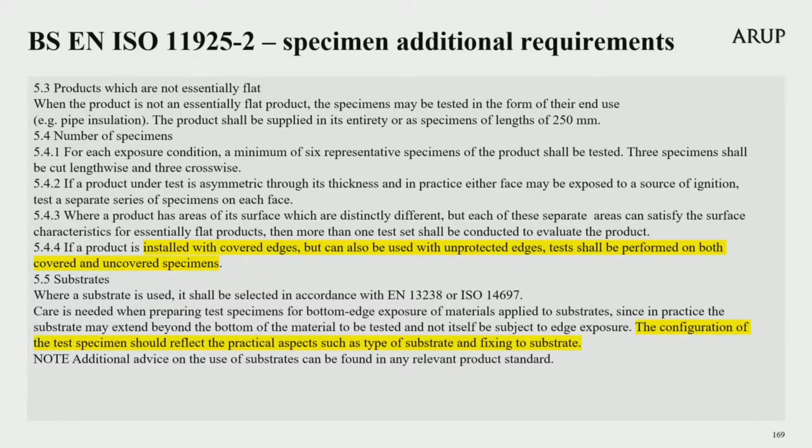Two different exposures are used: surface exposure and edge exposure. A surface exposure test must always be undertaken. Edge exposure tests are only undertaken if the edges can be exposed under end conditions. Therefore, if in the envisaged end-use application direct flame attack on the edge cannot occur, the product does not need to be tested. When a surface exposure is used, the flame is applied 40 millimetres up from the bottom of the specimen on its front face. A reference line is marked on the sample, which I will show you on the next slide. When an edge exposure is used, the flame is applied on the bottom edge of the specimen.

The flame is then applied to the material for either 15 or 30 seconds, depending on the classification the sponsor wishes to obtain. The higher European Class B down to the European Class D are based on a 30-second exposure. Once the flame is applied, the extent of vertical flame spread is observed and recorded.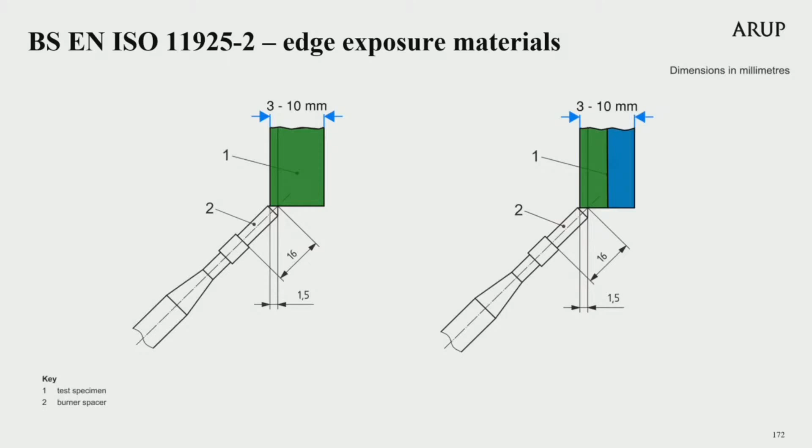Where the material is less than 3 millimetres thick, the flame is applied at the midpoint of the bottom edge, as shown in the test standard.

For all multi-layered products greater than 10 millimetres, an additional set of tests shall be carried out, with the specimen turned at 90 degrees round its vertical axis and the flame impinging at the bottom edge of the centre line of each different layer. A test is done for each of the layers that make up the sample.

I'm now showing you a video of this test procedure.

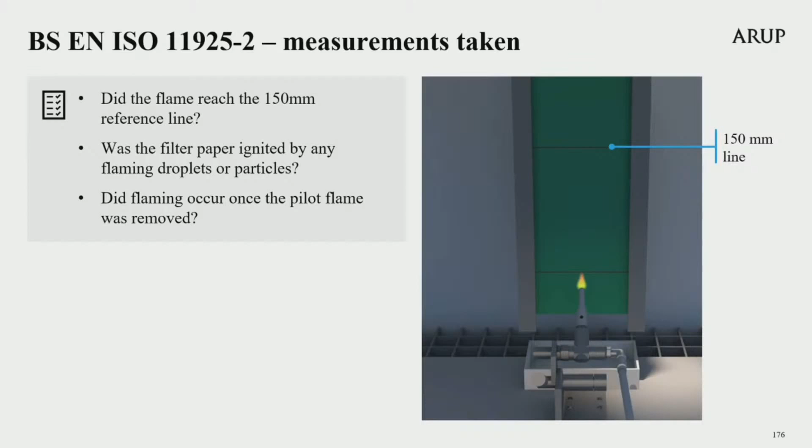Again, the test report has to include a general description of product tested, the form of construction of the specimen, including the description of substrate used and methods of fixing. This test also requires information on the intended application of the product, if known, and it contains the same statement again.

To finish this session, when I was explaining the single burning item test earlier, with the large-scale specimen heated in the corner, I mentioned that smoke production and flaming droplets were recorded in that test. I have also explained that flaming droplets are recorded in this last test, the single flame source test. In the classification standard, which I'm about to explain, it sets limits for little s and little d.